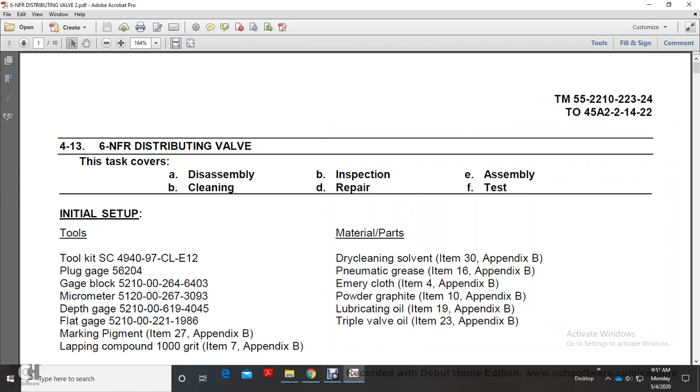Alright, testing. Your 6-NFR distributing valve, with the task covering disassembly, cleaning, inspection, repair, assembly, and test. Initial setup: toolkit SC 4940-97-CL-E12, a plug gauge, gauge block, micrometer, depth gauge, flat gauge, marking pigment, lapping compound, 1000 grit. Material parts: dry cleaning solvent, pneumatic grease, emery cloth, powdered graphite, lubricating oil, triple valve oil.

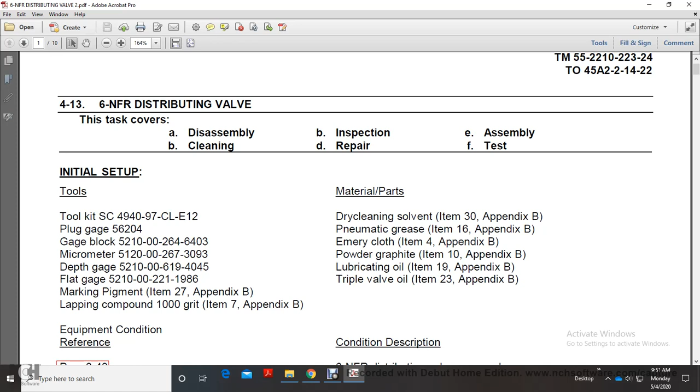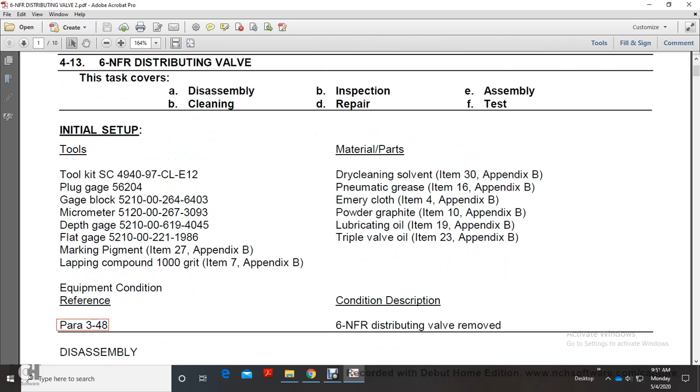Equipment reference, paragraph 348 of Technical Manual 55221022324. Condition description: 6-NFR distributing valve removed for disassembly. Warning: valve assemblies are under a spring load. Use caution during disassembly procedures so that parts do not fly out, causing injury to personnel.

Note: the 6-NFR distributing valve provides increased sensitivity with brake application and release, ensuring reliability of operation in long, multiple-unit consists. This also acts as a safety valve to limit the brake cylinder pressure to the required standard regardless of the brake pipe pressure employed. When removing and repairing brake valve components, check air lines and pipe lines for corrosion, breaks, splits, and loose connections. Repair of the air lines and piping consists of replacing defective pipe and pipeline connections. Refer to Technical Manual 55221022324P for identification of piping.

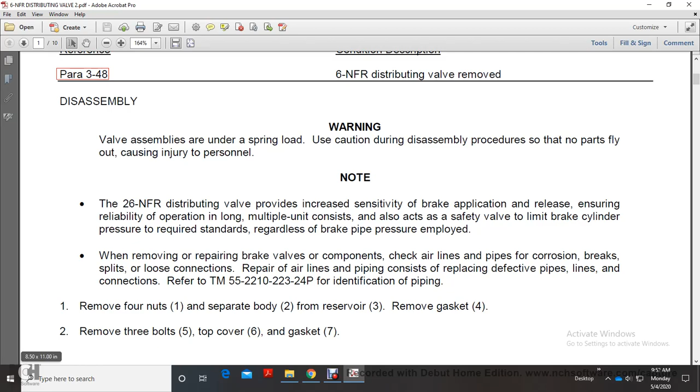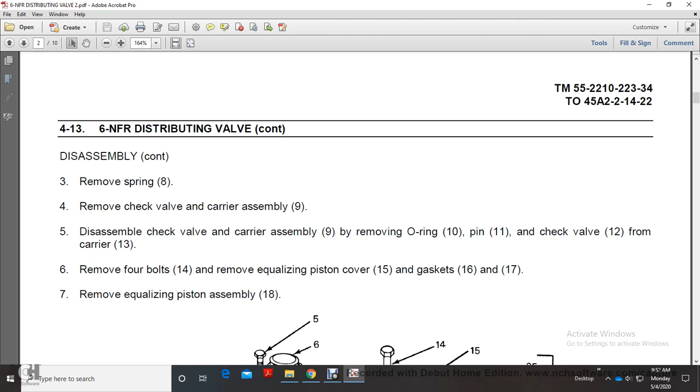Remove 4 nuts 1, separate body 2 from the reservoir 3, remove gasket 4. Remove 3 bolts 5, top cover 6, and gasket 7. Remove spring 8, remove check valve carrier assembly 9, disassemble check valve carrier assembly 9, remove O-ring 10, pin 11, check valve 12 from carrier 13, remove 4 bolts 14, remove equalizing piston cover 15, gaskets 16, 17, remove equalizing piston assembly 18. Alright, this shows your 6-NFR distributing valve. Backed out one step.

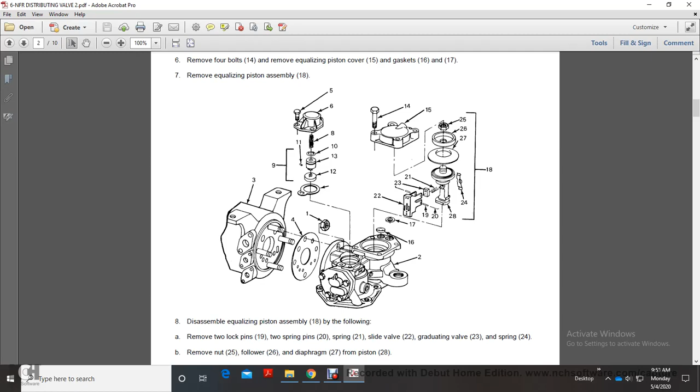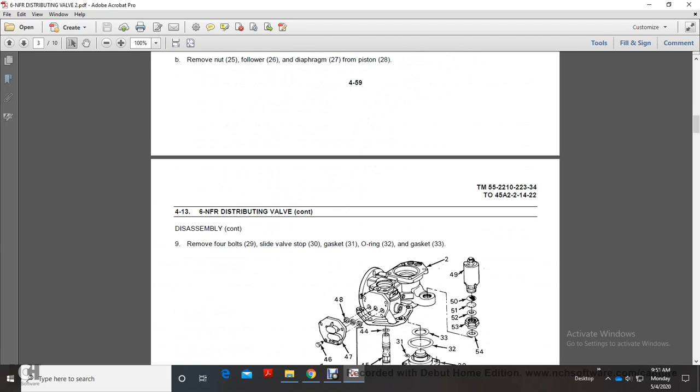Disassemble the equalizing piston assembly with the following. Remove 2 lock pins, 2 spring pins 20, spring 21, slide valve 22, graduating valve 23, spring 24, remove nut 25, follower 26, diaphragm 27, from piston 28. Disassembly: remove 4 bolts 29, slide valve stop 30, gasket 31, O-ring 32, gasket 33. And this shows another 6-NFR distributing valve picture.

Remove 5 bolts 34, bottom cover 35, gasket 36, remove the large diaphragm piston assembly 37, then disassemble large diaphragm piston assembly 37 by the following. Remove nut 38, follower 39, diaphragm 40, piston head 41, piston spring 42, remove O-rings 43, 44, and piston stem 45, remove 4 bolts 46, cover 47, gasket 48, remove safety valve 49, screen 50, strainer 51, gasket 52, adapter 53, and O-ring 54.

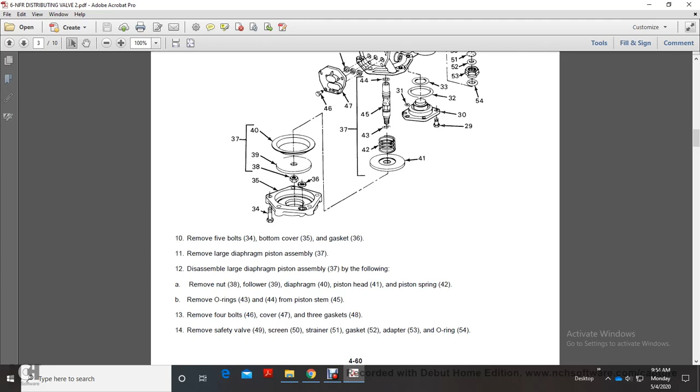Cleaning and inspection. Warning: dry cleaning solvent PD 680 is toxic and flammable. Wear protective goggles and gloves. Use only in a well-ventilated area. Avoid contact with the skin and eyes, and don't breathe vapors. Do not use near open flame or excessive heat. Flash point is 100 to 138 degrees Fahrenheit. If you become dizzy, get fresh air and medical aid immediately. If contact is made with your eyes, get medical aid immediately. Compressed air used for cleaning purposes will not exceed 30 psi. Do not direct compressed air against skin. Use goggles or full face shield.

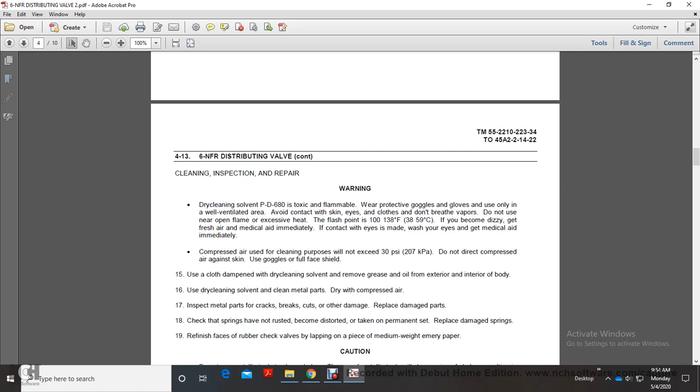Use a cloth dampened with dry cleaning solvent to remove the grease and oil from the exterior and interior of the body. Use dry cleaning solvent to clean metal parts, then dry with compressed air. Inspect metal parts for cracks, breaks, cuts, and other damage. Replace damaged parts. Check that springs have not rusted, become distorted, or taken a permanent set. Replace damaged springs. Refinish faces of rubber check valves using medium weight emery paper. Caution: do not use metallic tools to clean chokes. Using metallic tools will change the size of chokes, resulting in failure of the brake valve system.

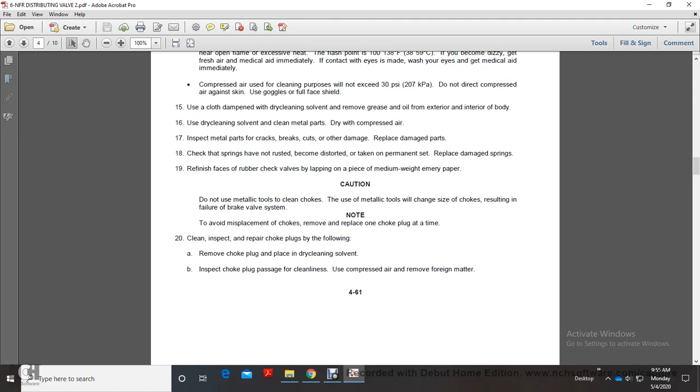Note: to avoid misplacement of chokes, remove and replace one choke plug at a time. Cleaning, inspection, and repair of choke plugs with the following. Remove choke plug, place in dry cleaning solvent, and inspect the choke plug passage for cleanliness. Use compressed air to remove foreign matter. Cleaning, inspection, repair continued. Clean choke plug with dry cleaning solvent and dry with compressed air. Check that the choke plug is clean and unrestricted, lightly coat threads of the choke plug with a compound consisting of 1 part graphite, 2 parts oil, and install.

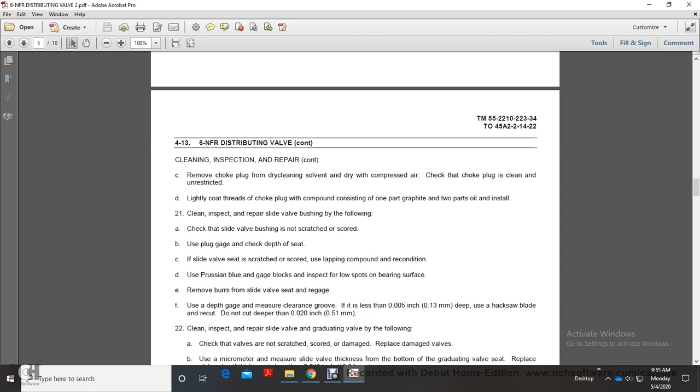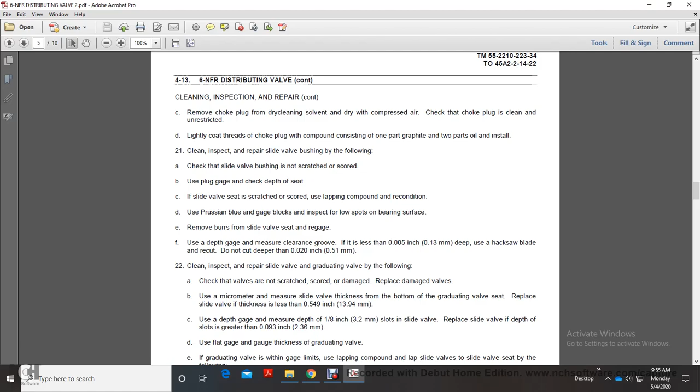Clean, inspect, and repair the slide valve bushing with the following. Check the slide valve bushing is not scratched or scored. Use plug gauge to check the depth of the seat. If the slide valve seat is scratched or scored, use lapping compound to recondition. Use gauge blocks. Inspect for low spots on the bearing surface. Remove the burrs of the slide valve seat and re-gauge. Use the depth gauge to measure the clearance groove; if less than 5 thousandths of an inch deep, use a hacksaw blade to recut. Do not cut deeper than 20 thousandths of an inch.

Clean, inspect, and repair slide valve and graduating valve and by the following. Check the valves are not scratched, scored, or damaged. Replace the damaged valves. Use a micrometer. Measure the slide valve thickness of the bottom of the graduating valve seat. Replace the slide valve with a thickness less than 549 thousandths of an inch.

Use a depth gauge. Measure depth of 1/8 of an inch slots in slide valve. Replace slide valve with a depth of greater than 93 thousandths of an inch. Use flat gauge thickness graduating valve. If the graduating valve is within gauge limits using lap compound, lap slide valve seat by the following condition valve by rubbing slide valve against the seat several times. The lapping compound removes the burrs and removes rough surface marks.

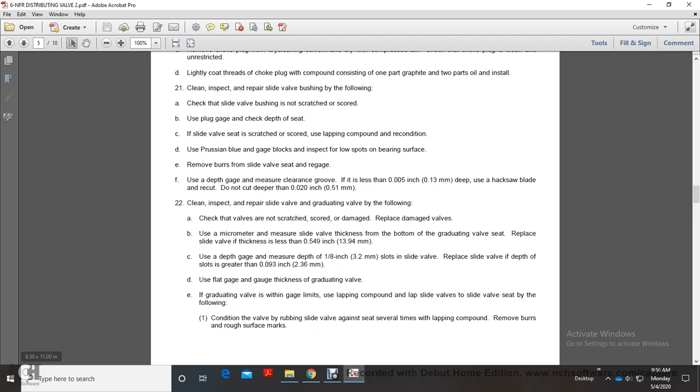Cleaning, inspection, repair continued. Warning: compressed air for cleaning purposes does not exceed 30 psi. Do not direct compressed air against skin. Use goggles or full face shield. Use compressed air to remove foreign particles from the cavities, gauge, and graduating valve. Regauge the graduating valve. Check the piston is not bent. Use a micrometer. Measure the diameter of 2 guides on piston. Replace the piston if it is greater than 1 and 733 thousandths of an inch.

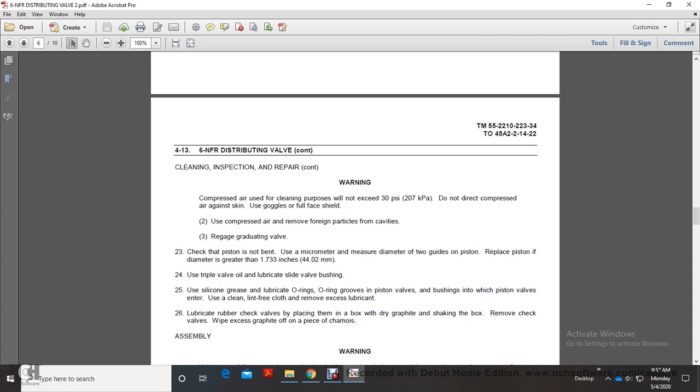Use triple valve oil to lubricate slide valve bushing, using silicone grease lubricating O-rings, O-ring grooves, piston valve bushings, which in the piston valve is entered with the use of a clean lint-free cloth. Remove the excessive lubricant. Lubricate rubber check valves, placing them in the box with dry graphite and shaking in the box. Remove the check valves. Wipe excessive graphite off on a piece of chamois.

Assembly. Warning: valve assemblies are under spring load. Use caution during assembly procedures that parts do not fly out, causing injury to personnel. Install O-ring 54 on adapter 53. Install adapter 53 with gasket 52, strainer 51, screen 50, safety valve 49 into the body 2. Install gasket 48 with cover 47, secure with the 4 bolts 46.

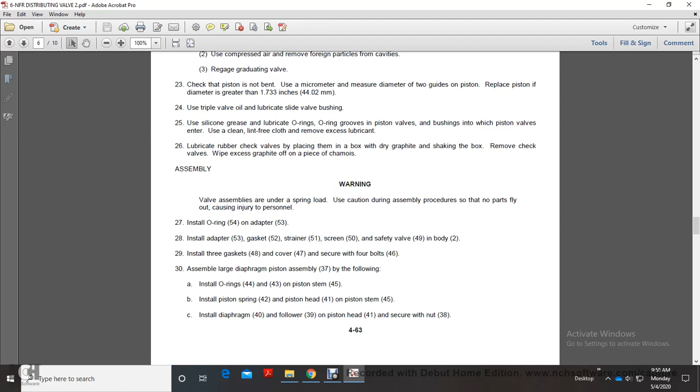Assemble the large diaphragm piston assembly 37 by the following. Install O-rings 44, 43 on the piston stem 45. Install piston spring 42 with the piston head 41 on piston stem 45. Install diaphragm 40 on the follower 39, piston head 41, secure with the lock nut 38. Install large diaphragm piston assembly 37 in body 2. Install gasket 36 at the bottom, cover 35 and secure with the 5 bolts 34.

Install gasket 33, O-ring 32 with the gasket 31, slide valve stop 30, position slide valve stop 30 on the body 2 with the screw of the four bolts 29. Assemble equalizing piston assembly 18 by the following. Install diaphragm and follower 26 on the piston 28, secure with the nut 25. Tighten the nut to 30 pound-foot torque.

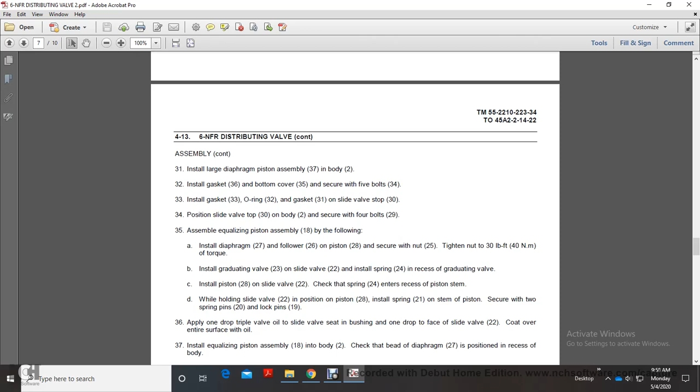Install graduating valve 23 with the sliding valve 22, install the spring 24 in recess of the graduating valve. Install piston 28 on the sliding valve 22. Check that the spring 24 enters the recess of the piston stem while holding the slide valve 22 on the piston 28. Install spring 21 on the stem of the piston. Secure with the 2 spring pins 20 with lock pins 19.

Apply 1 drop of triple valve oil on the slide valve seat of the bushing, 1 drop on the face of slide valve 22. Coat over the entire surface with the oil, install equalizing piston assembly 18 into the body. Check the bead of diaphragm 27 is in position in the recess of the body. Install gasket 17, 16, equalizing piston cover 15, secure with 4 bolts 14.

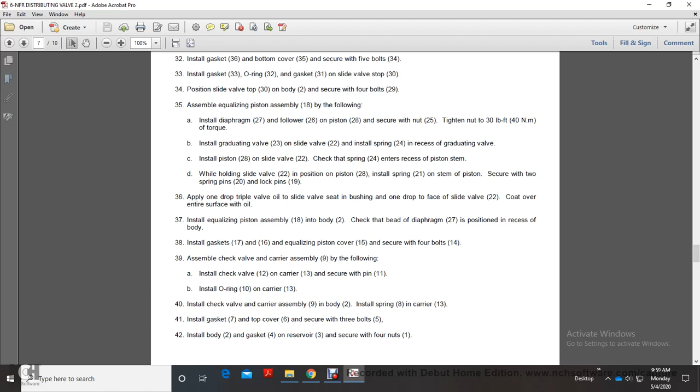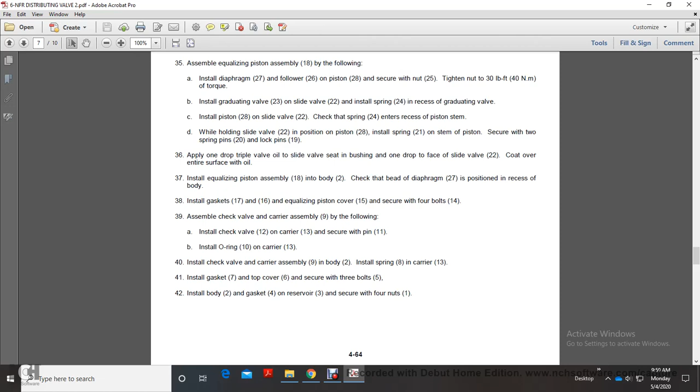Assemble check valve carrier assembly 9 by the following: install check valve 12 on the carrier 13, secure with a pin 11. Install O-ring 10 on the carrier 13. Install check valve carrier assembly 9 in the body 2. Install spring 8 in the carrier 13. Install gasket 7 on the top of the cover 6. Secure with 3 bolts 5. Install body 2, gasket 4 on reservoir 3 and secure with 4 nuts.

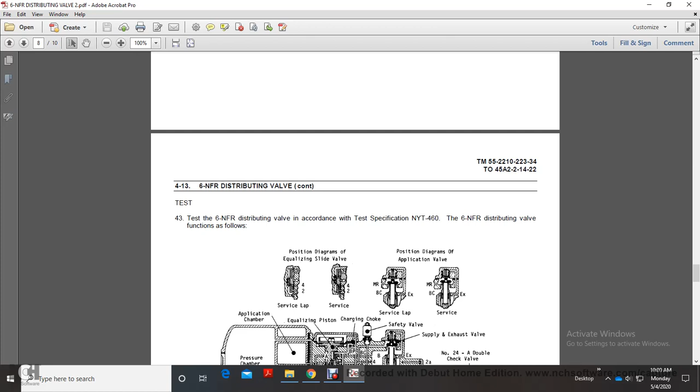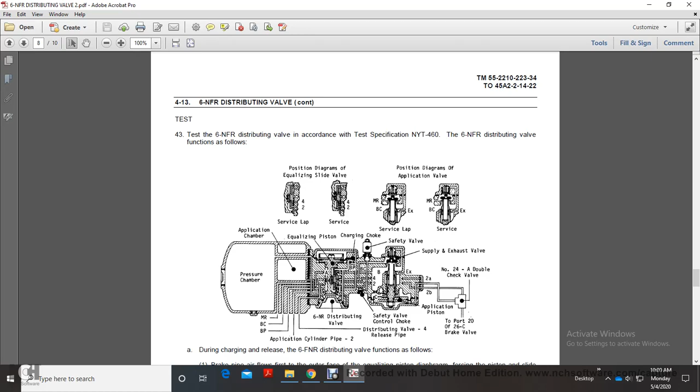During charging, release the 6 Nfr distributing valve functions as follows. The brake pipe air flows first to the outer face of the equalizing piston diaphragm, forcing the piston and slide valve to release position.

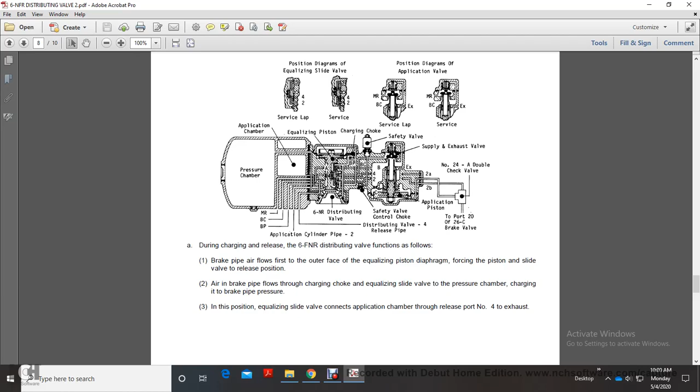Air in the brake pipe flows through the charging choke, the equalizing slide valve, to the pressure chamber, charging it to brake pipe pressure. In this position, the equalizing slide valve connects the application chamber with the release port 4 to exhaust.

At the application cylinder, on the outer face of the application piston, exhaust is via passage 2A through the 24A double check valve, passage 2B, to the distributing valve exhaust. The release spring holds the application piston in release position against the application cylinder cover.

The inner end of the application piston moves the exhaust valve seat away from the rubber seat of the supply and exhaust valve of the brake cylinder passage.

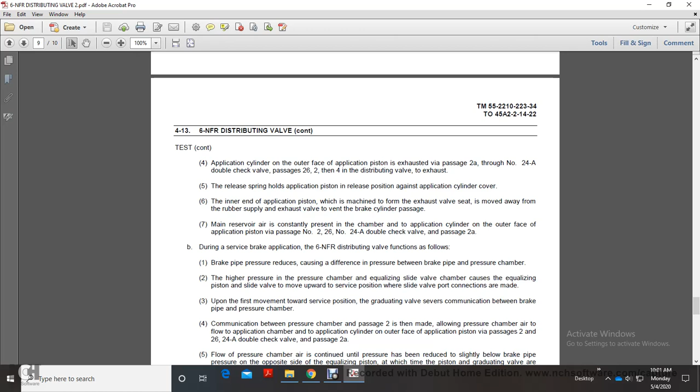Main reservoir air is constantly present in the chamber above the application cylinder, on the outer face of the application piston, via passage 2, 26 and the 24-A double check valve, passage 2A.

During service brake application, the 6-NFR distributing valve functions as follows. The brake pipe reduction creates a difference in pressure between brake pipe and pressure chamber. The higher pressure of the pressure chamber causes the equalizing piston and slide valve to move upward to the service position, where new slide valve port connections are made.

Upon the first movement toward the service position, the graduating valve closes communication between the brake pipe and the pressure chamber. Communication between the pressure chamber and passage 2 is then made, allowing air to flow to the application chamber and to the application cylinder outer face for the application piston, via passage 2 and 26.

Through the 24-A double check valve, passage 2A, the pressure chamber remains connected until its pressure has reduced to slightly below the brake pipe pressure on the opposite side of the equalizing piston.

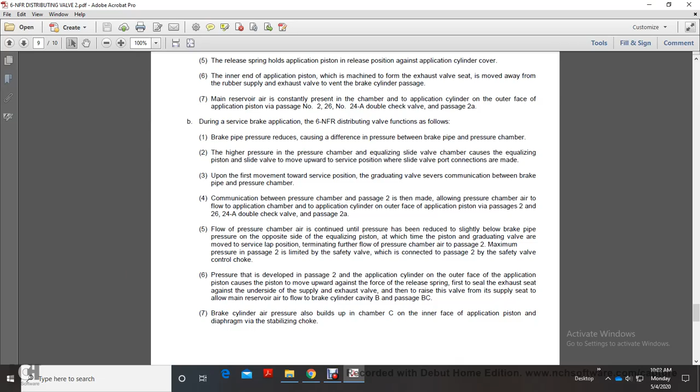At this point, the piston and graduating valve move to the lap position, terminating further flow of air to passage 2. Maximum pressure in passage 2 is limited by the safety valve, connected via the passage 2 safety valve control choke.

Pressure developed in passage 2 acts on the application cylinder outer face of the application piston cover, moving it upward against the force of the release spring. This seals the exhaust seat against the underside of the supply and exhaust valve, then raises the valve off its seat to allow main reservoir air to flow to the brake cylinder, cavity B, and passage BC.

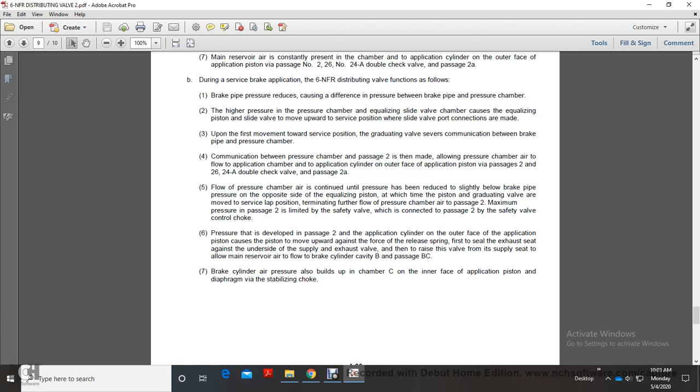Brake cylinder air pressure is also built up in chamber C on the inner face of the application piston diaphragm, through the stabilizing choke.

As the brake cylinder pressure in chamber C approaches the application cylinder pressure on the opposite side of the diaphragm piston, the application piston moves downward, allowing the supply and exhaust valve to seat, terminating further flow of main reservoir air to the brake cylinder.

During brake release, the 6-NFR distributing valve functions as follows. The increase of brake pipe pressure balances the equalizing piston and slide valve to the release position, connecting the application chamber with the exhaust port 4, reducing pressure in the passage for the application cylinder.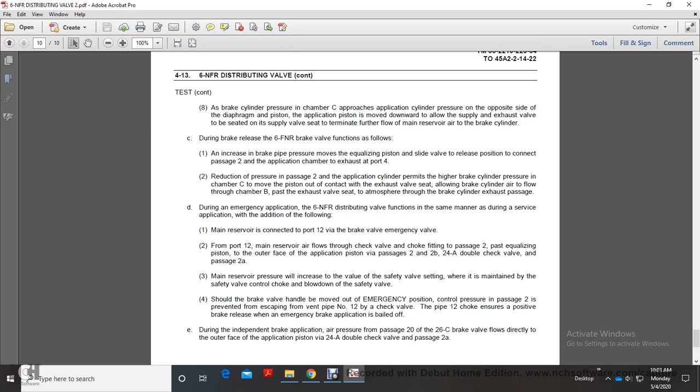This permits the higher brake cylinder pressure in chamber C to move the piston out of contact with the exhaust valve seat, allowing brake cylinder air to flow through chamber B, past the exhaust valve seat, to the atmosphere via the brake cylinder exhaust passage.

During emergency application, the 6-NFR distributing valve functions in the same manner as during service application, with the following additions. The main reservoir is connected to port 12 via the brake valve with the emergency valve.

Port 12 main reservoir air, with a check valve, fits to passage 2, past the equalizing piston, to the outer face of the application piston, via passage 2 and 2B, and the 24A double check valve, via passage 2A.

Main reservoir pressure will increase up to the safety valve setting, which is maintained by the safety valve control choke and blowdown of the safety valve.

When the brake valve handle is moved out of the emergency position, control passage 2 prevents air escaping via the vent pipe number 12 check valve. Pipe number 12 choke valve ensures positive brake release once the emergency brake application is bailed off.

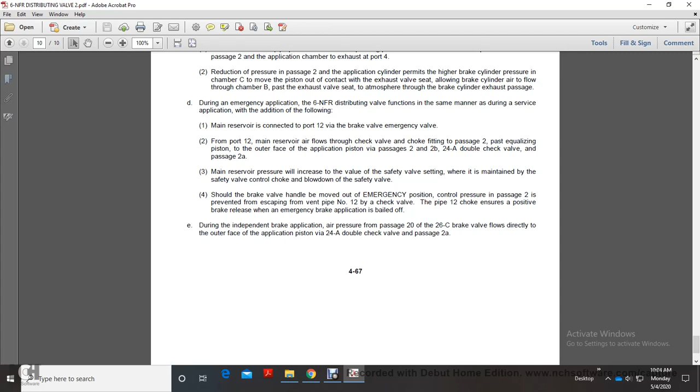During independent brake application, air pressure from passage 20 of the 26C brake valve flows directly to the outer face of the application piston, via the 24A double check valve, passage 2A.

And that completes our coverage of the 6-NFR distributing valve 4-13.